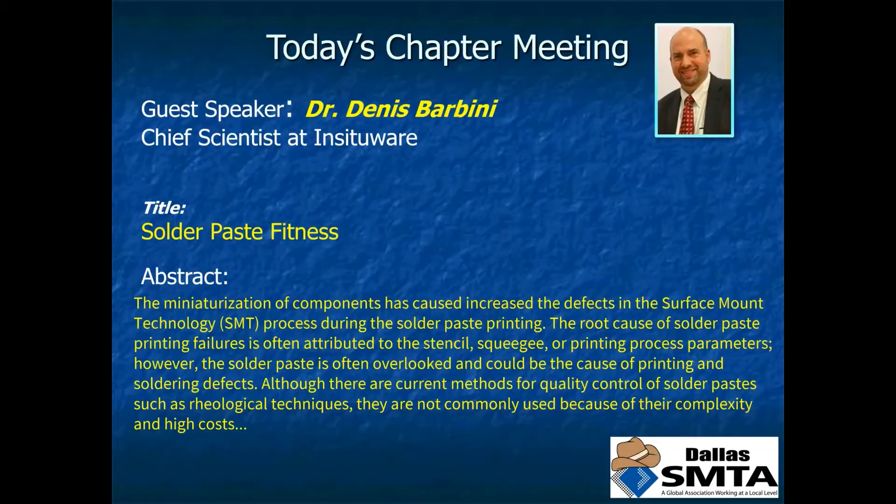What I wanted to start off by saying is, when I look at what's going on now, one of the things I've been participating in and reading about is how resilient we are as an industry. In my time, which dates back to the mid-90s, we've had many challenges: economic downturns, shifting manufacturing geographies, pandemics—not just COVID-19, but also SARS and MERS, though those were smaller. We've had to deal with material bans, CFCs, banning lead, and going to RoHS.

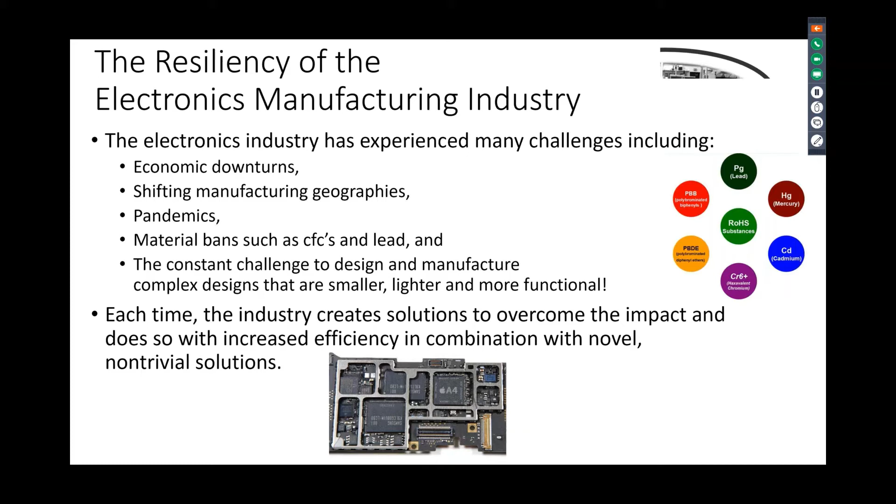All of these things were very challenging to the industry, and there's always a constant challenge to design and manufacture complex products that are smaller, lighter, and more functional. What I've observed over those couple of decades is that each time, the industry creates solutions to overcome the impact, and does so with increased efficiency and innovation that's novel and non-trivial. So we come back stronger and better, and we're able to deliver what our customers are asking for. So that's the good news.

We'll get through this. How are we dealing with COVID-19? When I look at this slide, the first response really focused on the safety and health of the workers, which continues today. This webinar today is the very reason we can't get together—we can't go in the room and sit down and have a beer like Gary was saying, but we can do it online.

Simultaneously, the demands of some companies were to keep going because they're essential and need to produce at certain rates for ventilators and products of that kind of impact, while other companies had to ramp down. Either way, this situation has created significant stress on our system.

So the next set of challenges is developing and implementing the new reality. For the individual, it's going to be based on safety training in this new reality, having new tools, having the flexibility to have different shifts or being able to stay safe. Those are the things that are really going to be focusing on the individual.

The workplace is going to change as well. There's all these different states saying this is how you can reintegrate, but it's going to limit person-to-person interaction, for safety for everybody. That's going to take a lot of training, looking at standards in manufacturing, such as smart factory being not just slowly integrated, but forced—in the next year to year and a half, we're going to have innovations that will change the way we manufacture.

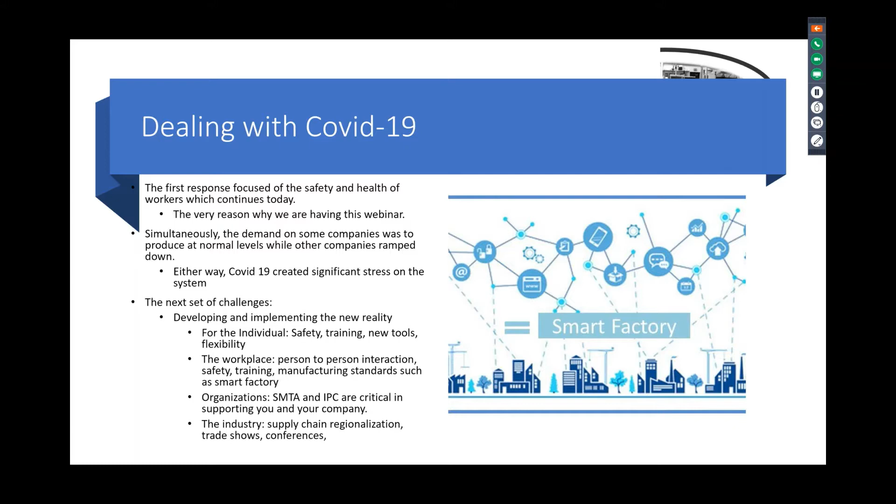This plays perfectly into the challenges that we have today, which have existed since electronics started: we want product miniaturization, we want to protect the environment, we have certain applications that demand power or demand the ability to take some resources. At the same time, we're concerned about the cost not being too much, but the quality being very high. Where does this blend into?

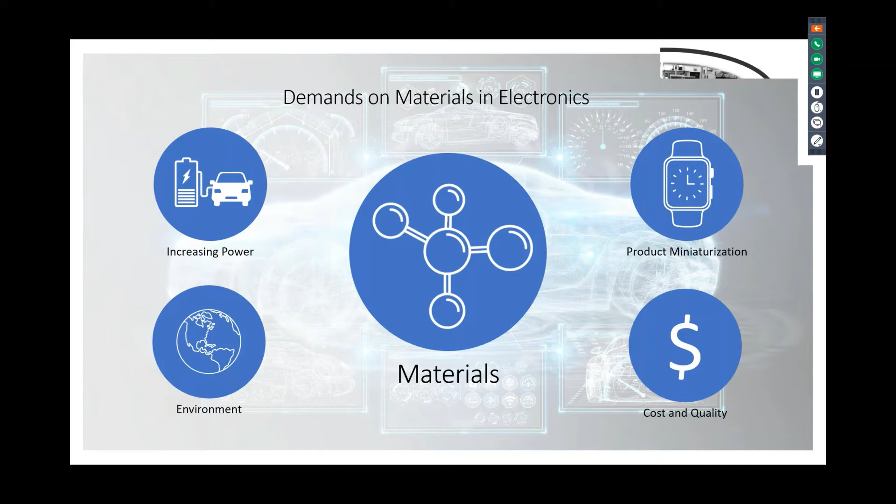The point of this slide is looking at, in the center, materials. If we can get the materials that are proper and use them in a proper way, then we have a good chance of making a good product that's successful at the cost that is appropriate. So that leads me into focusing on the rest of the presentation, which is why we control materials and how we do it.

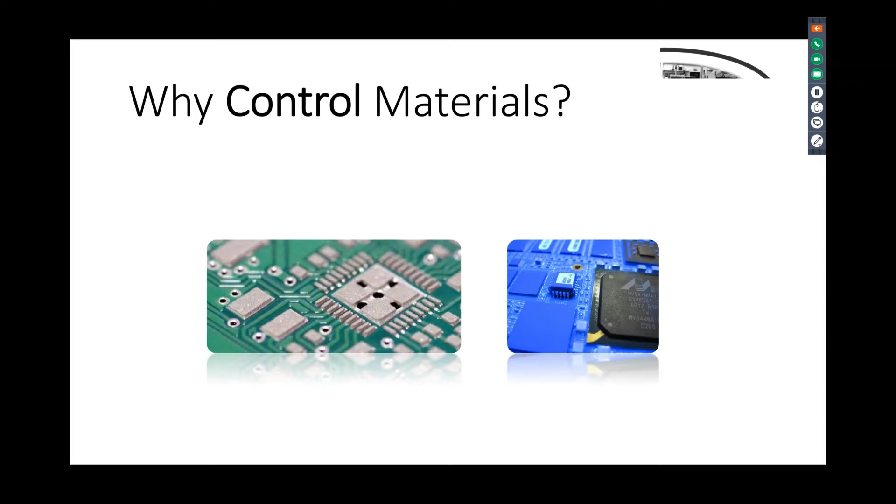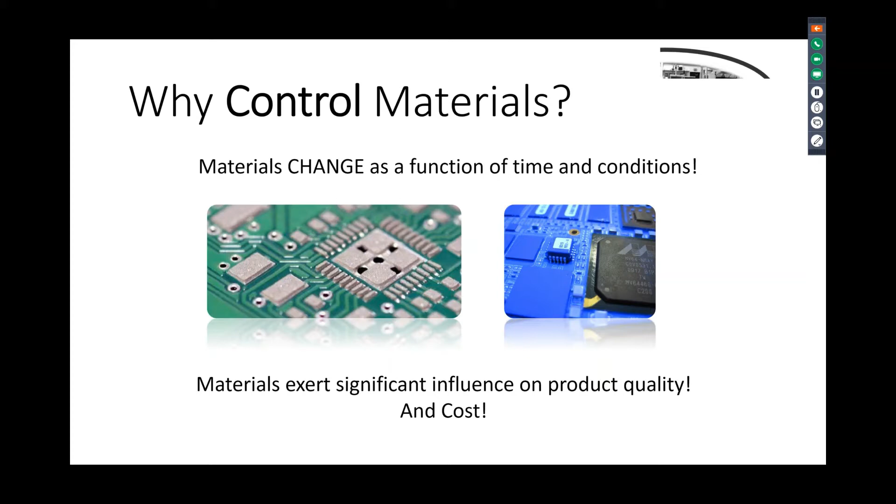So I'm going to be talking about this the rest of the time, saying we need to control materials, because materials change as a function of time and conditions. Materials are going to exert influence on product quality as well as the cost. So this is why we need to control materials.

It's very critical. On the process side, the manufacturing process, the industry has done a great job focusing on and understanding the assembly process - looking at how we do from printing to pick and place to reflow. We have all these different tools to fix the process as well as the design. Failure analysis is a science unto itself and requires a very in-depth understanding of how the PCB is fabricated, rework, surface mount assembly, and a number of different topics here. So in any given factory, or a company, you need to have these types of expertise to make sure you're developing a process that's in control, minimizing your DPMO and increasing your yield.

So being able to characterize defects is very critical, but this is already at the end. We need to control the materials up front.

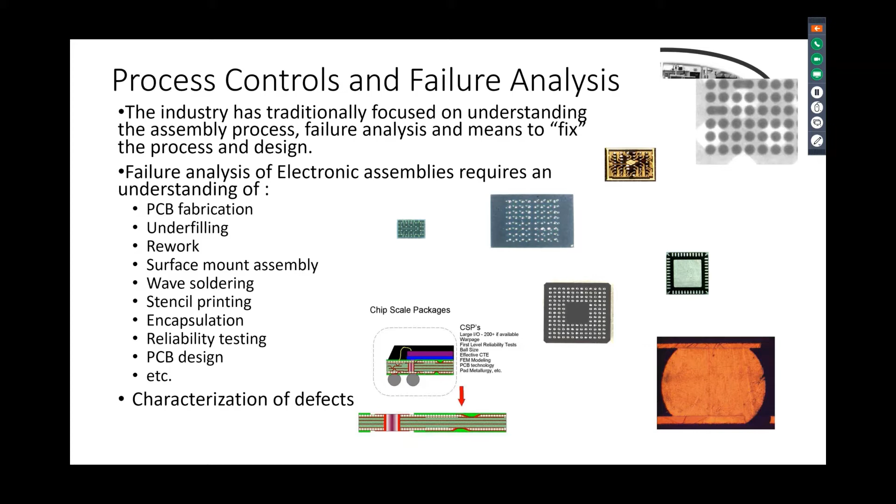So the current assembly process - we can say with confidence that there's been a lot of effort in controlling the manufacturing process, but we know that defects still occur. Solder paste inspection, SPI machines, exist because the printer, even though it has a lot of learning in it now, is still producing some defects. So the solder paste inspection goes back and can actually correct it now, can work with the printer to adjust the parameters. Reflow ovens and profiles are set up with golden boards, and they're able to do a very good job of keeping that process in check.

But once again, you have machines afterwards that are dealing with trying to inspect how many defects are on the board. So we're getting to the next level of a smart factory, where these machines have the capability to communicate to one another and dynamically, on the fly, change process parameters to improve yields. However, even after we have all this sophistication, the manufacturer still doesn't have control over the performance of its materials.

So as I mentioned, when the SPI communicates to the printer, you can make some changes here and there, but it's not responding to the material change. It's not responding to saying, okay, my material started at time zero, but now at time one hour, it's changed - maybe the temperature, the humidity has changed, or it's been absorbing something, and as a function of the properties, now we're creating defects. So really we need to understand the characterizing and monitoring of the paste itself in this case.

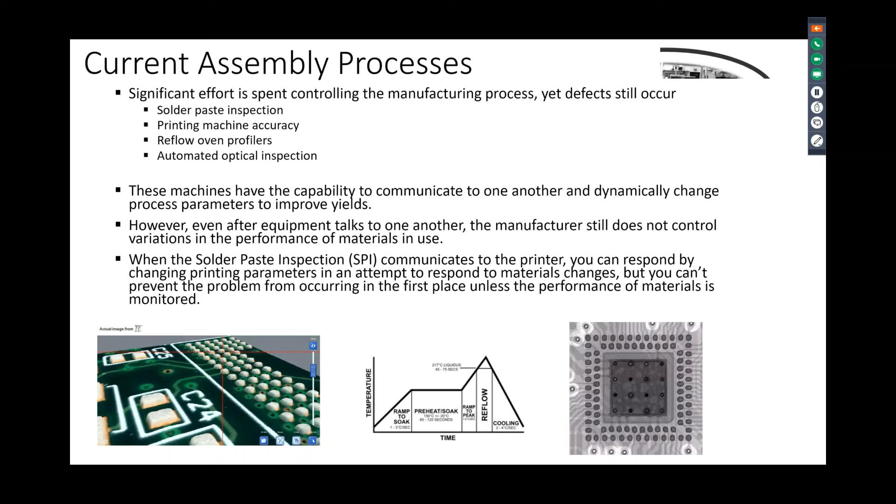So, material sensitivity. Process controls, as I mentioned, to summarize that part of it, exist to optimize the assembly process, but materials require proper handling and consequent characterization so that we can achieve the best quality. And these images right here are showing how materials can be sensitive - in this case, coalescence versus non-coalescence, on the left versus right. And it's a function of using nitrogen in a reflow process.

Well, why is that? Is there something with the paste? Is there something with the flux chemistry? It could be a number of different things. So we need to understand our materials.

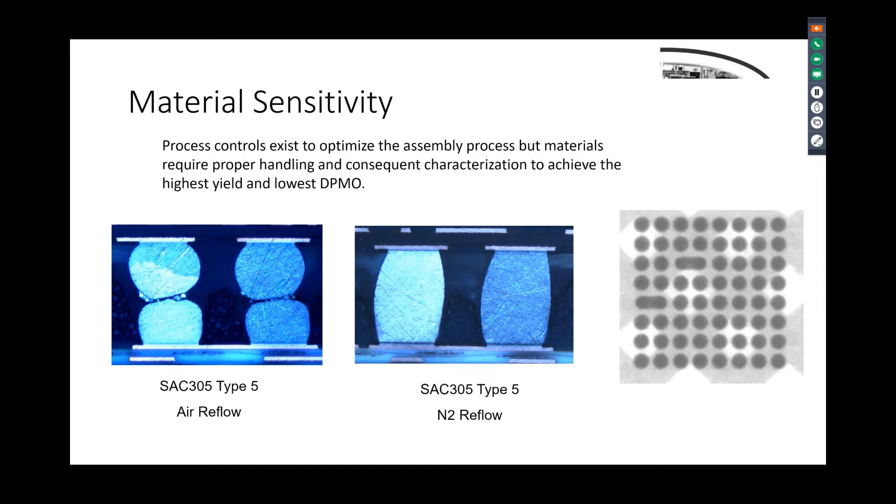So in this slide, we kind of assume that by taking care of our paste, our boards, and our components, everything is consistent and nothing's really changing on the manufacturing floor. But obviously this is not true. Unlike any other process input, you should expect materials to change as a function of usage and time in the factory environment.

So when it comes to manufacturing, we all look at what our process window is - how tight is it, so that we know where the sweet spot is, and we can control our parameters to try and maintain our assembly in the middle of that process window.

When it looks at shipping, if we have delays, or things are left out, or they're not packaged properly, materials are going to change. So how do we know that when we get the material, it's in the state that it was manufactured in? And then how long do you keep it on the shelf?

And this is a good example for these times, the times that we're in right now. As we move back to going to work, and things are opening up, and factories are opening up and ramping up volume production - have the materials changed since they were last used?

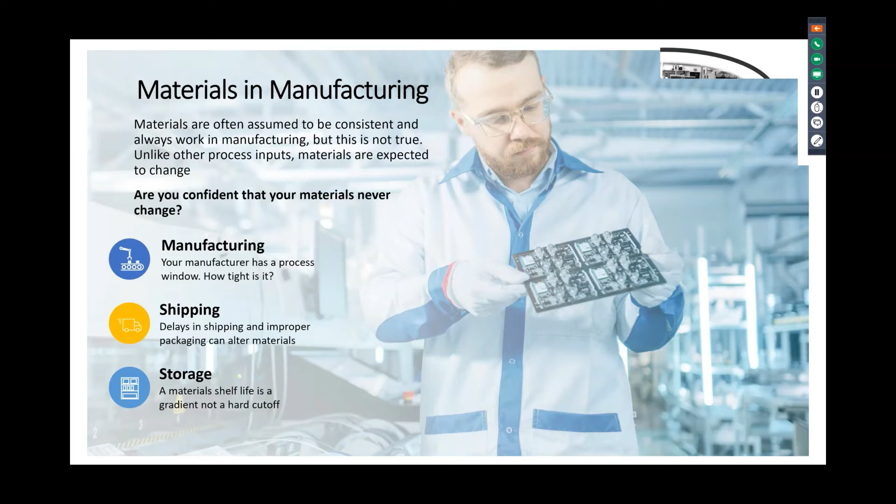How much inventory of PCBs, components and paste do you have on hand that may have been around for 2 months? Can you still use those, or has it gone beyond the expiration date? These are things that really are going to challenge us in the near future, if not already.

We need to understand how that will affect the ultimate reliability and quality of the process. Everyone's seen this type of slide where as you go from left to right, from 1 to 6, material problems become harder to diagnose and very costly. If we can measure material at block number 1, at incoming, and find out whether it's fit for use, versus waiting and looking after reflow, we can save a lot of time and money in test and rework. So we're going to talk about that quite a bit.

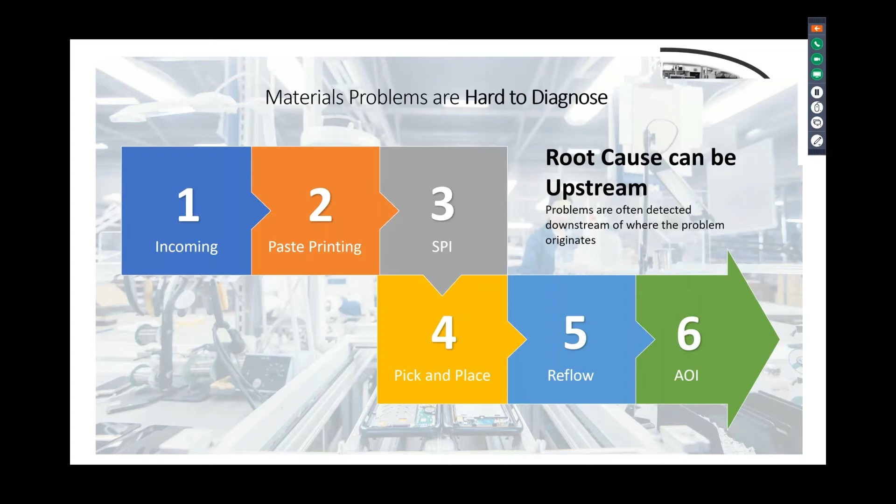So let's take a step back. I put a couple of slides in here to reach out to everybody listening, a question for all of us: as we return to normal manufacturing, do you know if your materials are going to be the same, or if they've changed? Are you going to be able to use these materials? Of course there are many different materials—I'm going to focus on paste, but there are many that could be of concern to you. Can you answer the question: how will material changes impact yield, DPMO, rework, you name it? It's going to affect your factory and its manufacturing process. So once again, I'm trying to communicate that we need to really control our materials and characterize them.

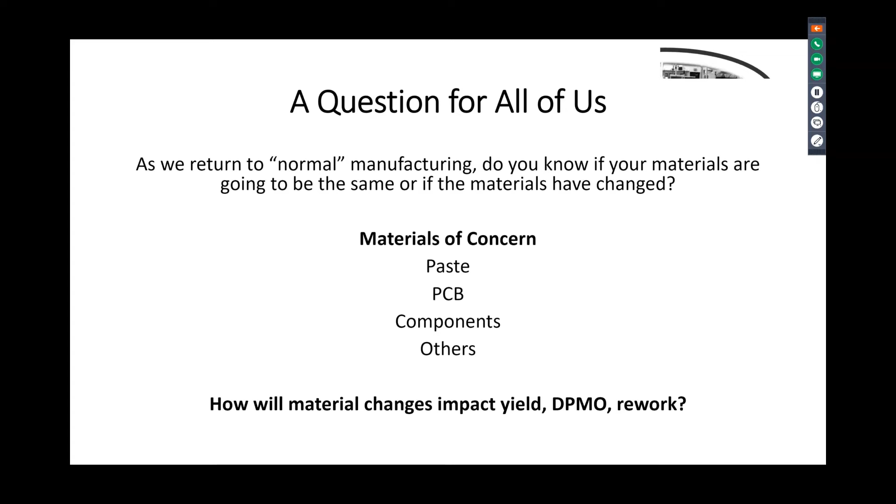In corroboration with that, as you go down the process, it becomes harder and more costly to fix problems. We know that 50 to 70%, depending on who you ask, of defects in surface mount are related to the printing process. And a subsequent 30 to 50%, almost half of the manufacturing cost, is due to test and rework.

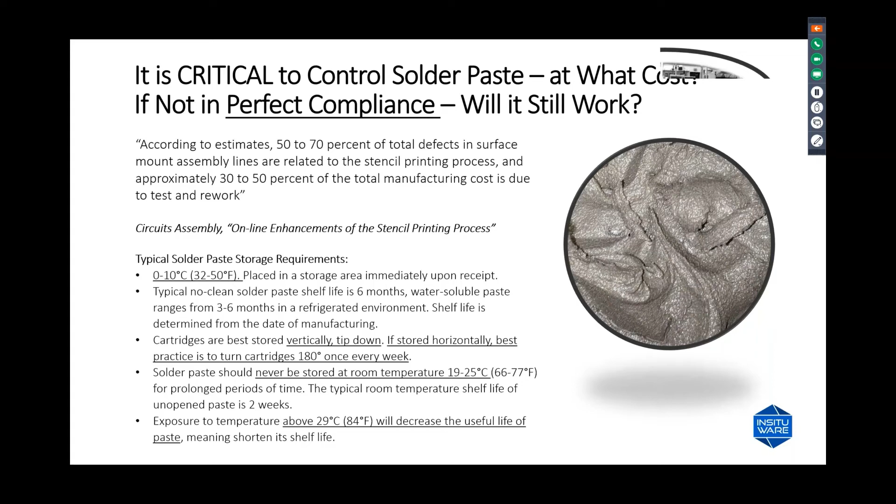We do a great job of understanding the printer and the parameters that are important. We have SPI, and now we have a method that tells you how to store your paste—it gives you the temperature and a number of different things you should do. Then on this page, you look at first in, first out. Paste should be brought to room temperature for 3 to 4 hours, and you should never use a mixer, things of that nature. These are just guidelines that say if you do this, your paste will be fit for use.

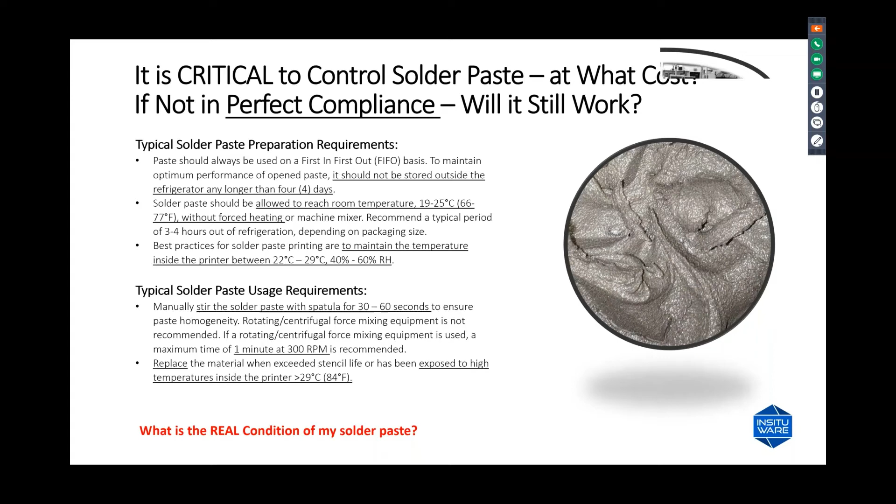But what is the real condition of your solder paste? When Insituware looks at how to track paste fitness for use—right now, as it currently exists, the paste supplier provides conditions for storage, preparation for use, and actual use. The factory has best practices and a manufacturing flow you have to use in order to get the best yield and the best DPMO.

This is based on experience, based on design and controls the company has put in place. There are systems that exist tailored to track all materials, not just paste, from receiving to use on the factory floor as it travels through the manufacturing process. This gives the manufacturer traceability of the paste container. Then you have the combination of printer, SPI, reflow, and AOI systems that provide feedback to improve process parameters and mitigate defects. That's what we do today in most factories.

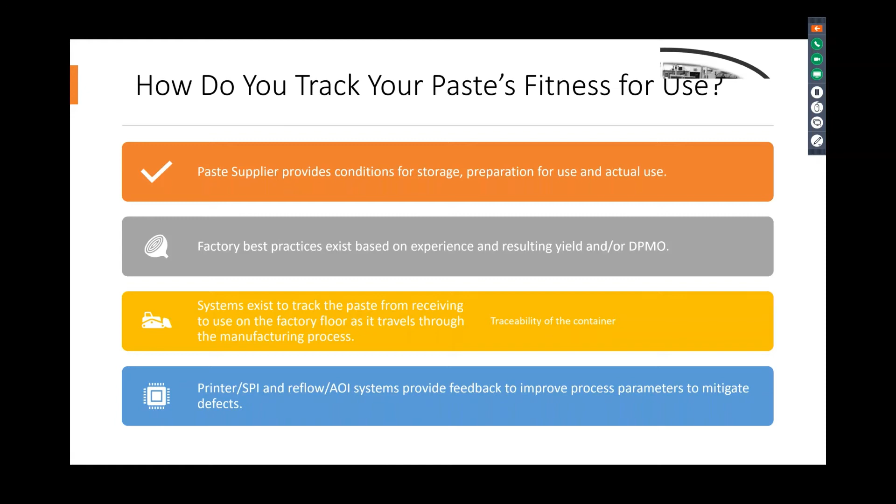But I just went through a whole bunch of things—are we really monitoring the paste itself? The answer is no. And that's why we're looking at the need to revolutionize the way we control materials in manufacturing. How are we going to do this? We're going to take material science and material characterization techniques that started in the laboratory and bring them to the manufacturing floor. Sounds pretty easy—it's very complex, but it's something we've pioneered in doing.

So to drive home the point that materials change over time, this is a simple rheology experiment where the x-axis looks at time zero. You put paste on the stencil at initial time zero, through 12 hours, and you're looking at how the paste is going to recover.

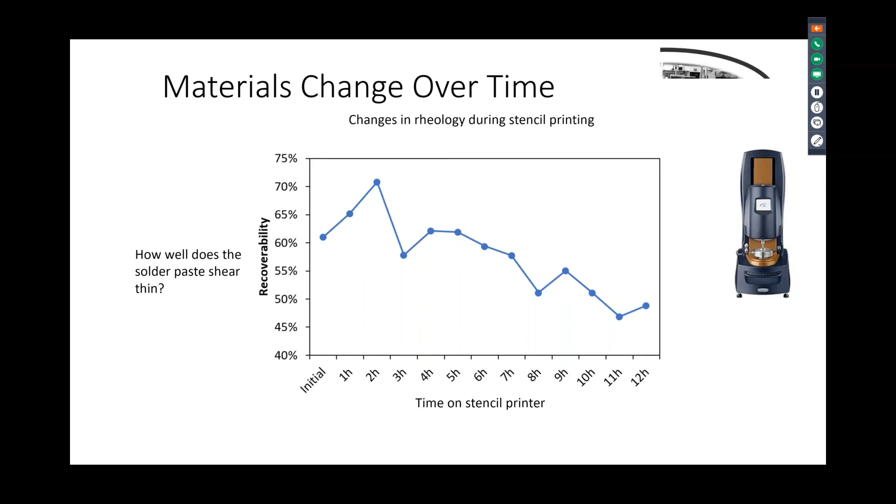We start about an average of 65%, and we go down to, let's say, 45%. So you have a 20% decrease in rheology. Now, how is that going to cause defects? Well, the material certainly changed, so that's going to impact the paste transfer through the stencil and ultimately cause a number of defects.

That's why Insituware did the research, figured out how we can help the industry in measuring solder paste at the manufacturing floor within 3.5 minutes. So it's our vision system.

I'm not going to talk too much about that. I just want to really focus on the technology. If this is your line, we see there's more than just 5. We've kind of done about 18 different ways of where controlling your solder paste or monitoring can be made, and we're learning from customers like yourself how this could be used to improve your process.

But if you look at number 1, so we take a measurement, and I'm going to talk about that in a moment. We're going to be looking at incoming materials. So you get a shipment from your paste supplier. You can do a test and say, okay, this is the baseline of the material, and it's representative of the lot. And then we can track it lot to lot over time to see if there's any variation in the viability. And if anything happens, then you can contact the paste supplier right at the start without even using it.

This is one of the things I'm talking about, if you manufacture the entire product but never measured it at incoming, that could be a major problem.

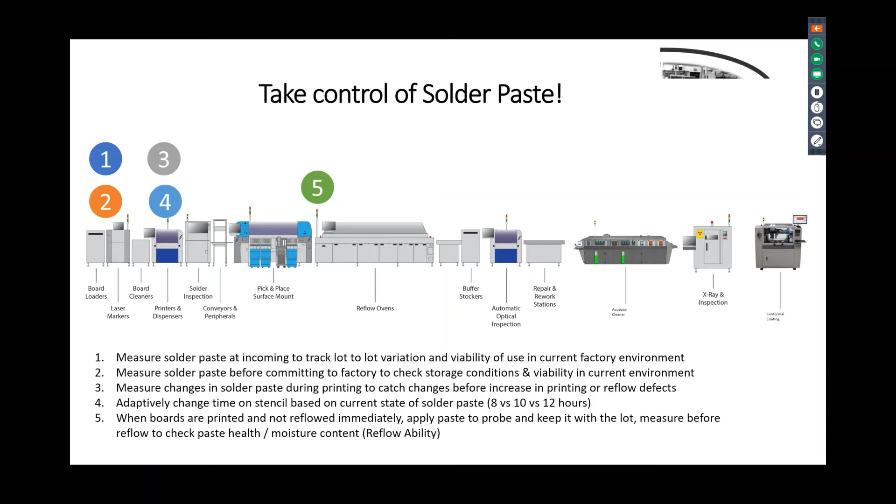So what are we measuring? It depends on if it's water soluble or a no clean. But for water soluble, number 1 here is the powder reactivity coefficient, the PRC. This is due to the aggressive nature of the flux-powder interaction. It's very aggressive, we're trying to remove the oxides from the metal surface. And in water soluble, that happens very quickly. So we're measuring the PRC in water soluble.

And in no clean, the activator package is much different, so it's not as aggressive. This way you don't have to wash it. And as a result, we're looking at the ion mobility within the bulk of the flux. So that is going to be at a slower rate, and it happens in the bulk flux media, which is different from the activator interacting with the metal. So how does this work?

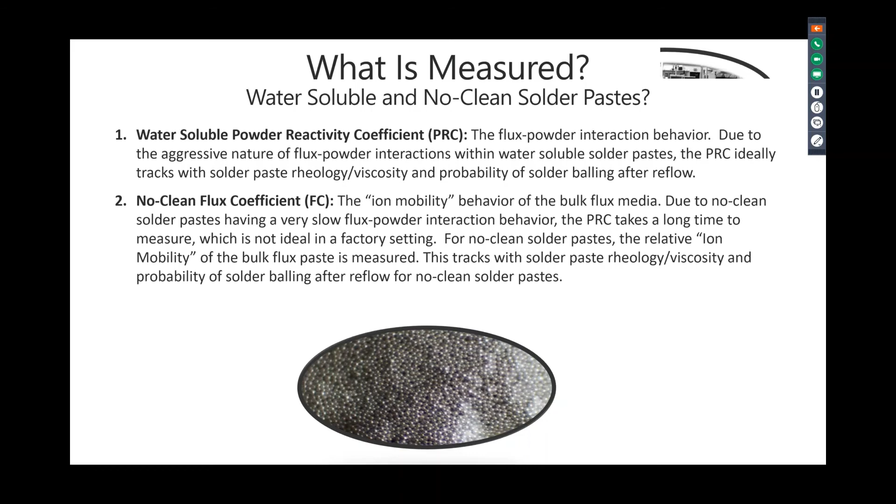It's electrochemical analysis. On the left-hand side, you see little deposits of solder spheres and paste. On the right, top right, you see the electrochemical scheme. You have a working electrode on the left, reference electrode on the right, and the metal acts as a resistor. The flux media itself has capacitance and resistance.

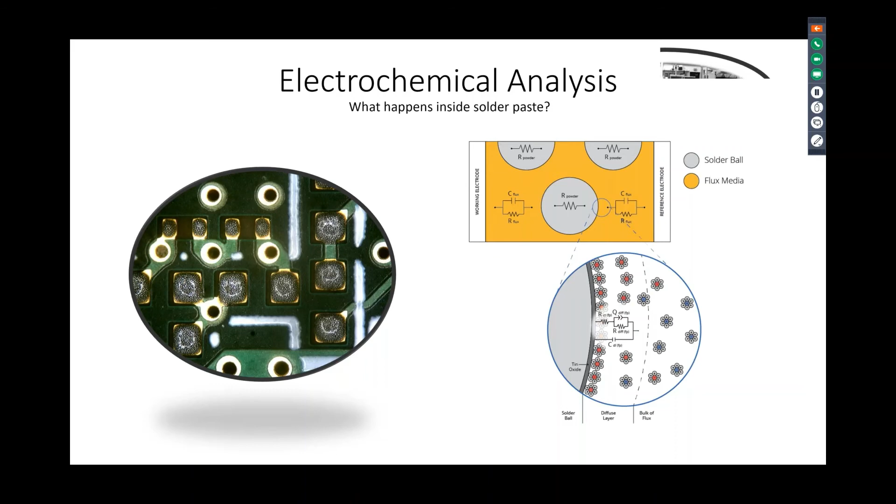We're looking at the reaction of the bulk media, the blue spheres on the right, and how fast those ions are moving. Versus, for water-soluble paste, we're looking at what's happening between the surface of the metal, removing the oxides with the activator. So depending on the paste type, that is what we're looking at.

This talks about homogeneous materials—these are the bulk properties, over to the right-hand side of that sphere with the blue molecules. The heterogeneous is basically the reaction rate between the oxides on the metal and how fast that interaction is taking place.

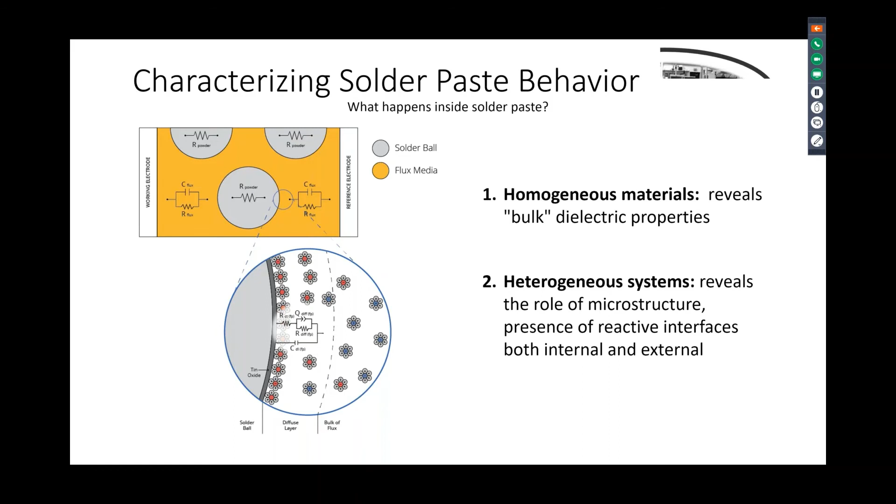So what we're trying to do here is apply electrochemical understanding to printing performance. A little bit of science there. But what does this mean in terms of manufacturing?

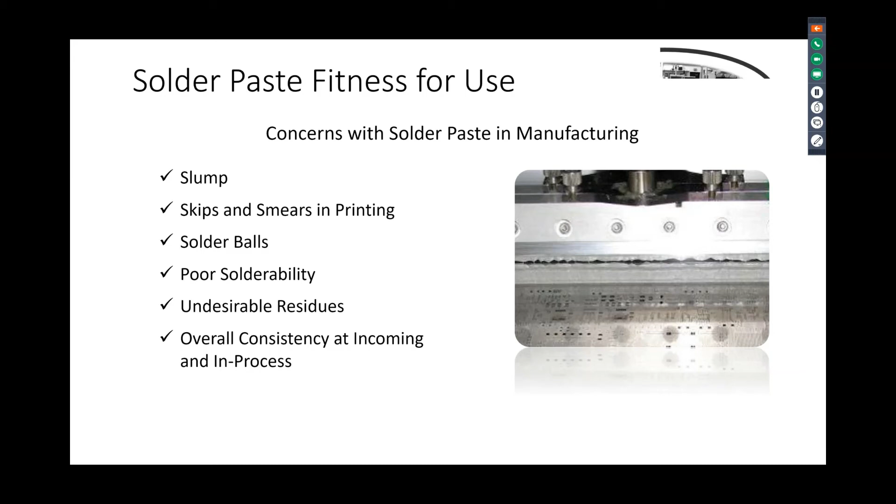Basically, we're looking to address concerns in the manufacturing process like slumping, skips, smears, solder balls, and in soldering, poor solderability, undesirable residues, and consistency issues at incoming and in-process. Once again, we're trying to determine if the solder paste is fit for use depending on its chemical formulation as a function of time and conditions.

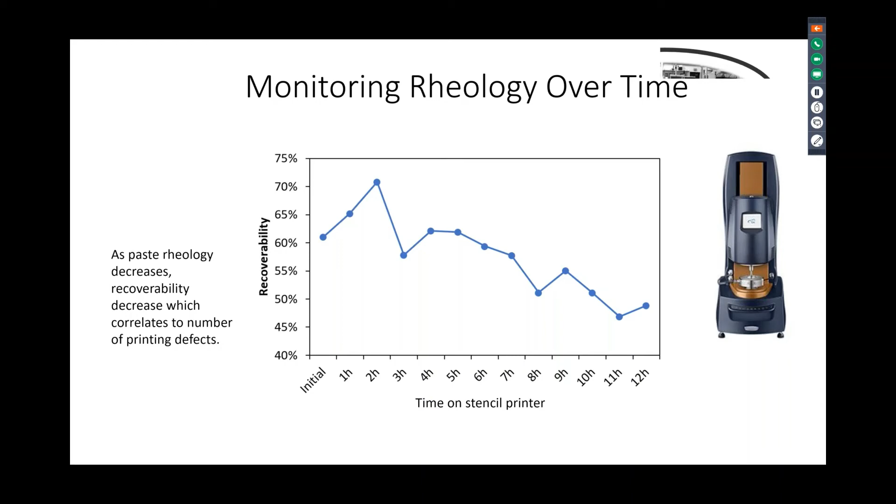I showed this slide before, but now you're seeing how this is an important property. As the paste rheology decreases, recoverability decreases, which correlates to the number of printing defects. So in this case study, we looked at defects as a function of paste fitness.

Using SPC type of analysis here, we're overlaying data—below the yellow line, you're in control. So you're measuring the PRC, the powder reactivity coefficient, and any number below that yellow line is in spec. If it goes beyond, you're in a place where you might get some defects.

But once you get above the red line, around 3 in this case, you start to see skips. So once again, this is like you'd do with any other machine—you have these control limits set up that tell you whether or not the process is in control.

Now we're taking our material measurement and doing the same thing, relating it to the defects. So this is the missing piece of the assembly process—we're combining the knowledge of the machines with the knowledge of what's going on with the paste.

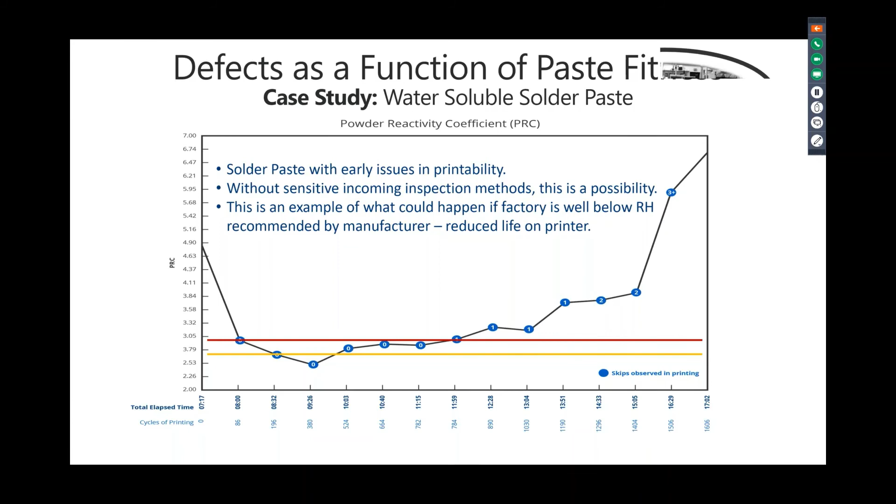We know there are many properties that affect the paste itself. These are things typically done at the paste supplier or in the lab, where you're measuring the rheologic properties, the bulk ionics, the solubility. You're not doing this on the manufacturing floor. So that's what we're changing.

We're taking these analytical tools and bringing them to the manufacturing floor, giving you very rapid results to let you know right away whether or not your paste is going to be fit for use.

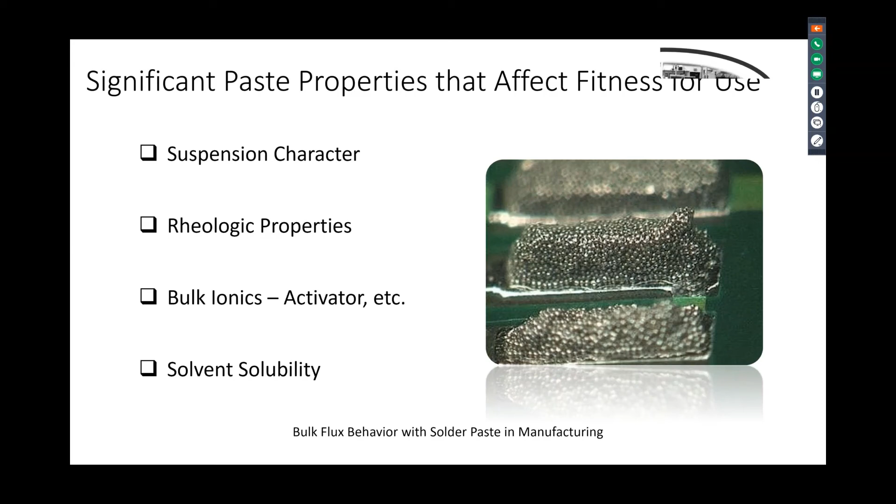How does that affect your reliability, or your performance, or paste transfer, and ultimately product performance and yield? So once again, by measuring the flux coefficient and making sure it correlates to the defects you're observing, you can put these control limits in place.

So that any operator can just make a measurement, plug it into the information system, and it will say whether this is out of control or in control. That will be on the device—the device will tell you that. So these are the important things.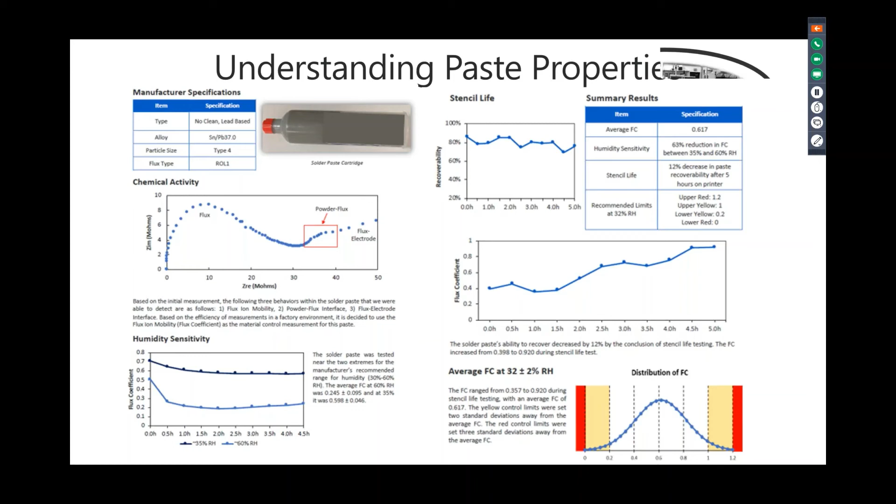If I look at the bottom right of this, I want to translate the paste properties to the fitness for use. Ultimately, the bottom right is this process control limits that we're trying to achieve. Being able to say, if your process window for a given paste at a given humidity and temperature, you can set it so that paste has a value that's somewhere between the limits, the yellow and the red. That's where you want to be.

Same thing you would do in a reflow oven, whether time above liquidus or overall time, how much heat a component can absorb. So these are things that really kind of put together all the attributes of a manufacturing process that gives you the power to optimize and get the best yield.

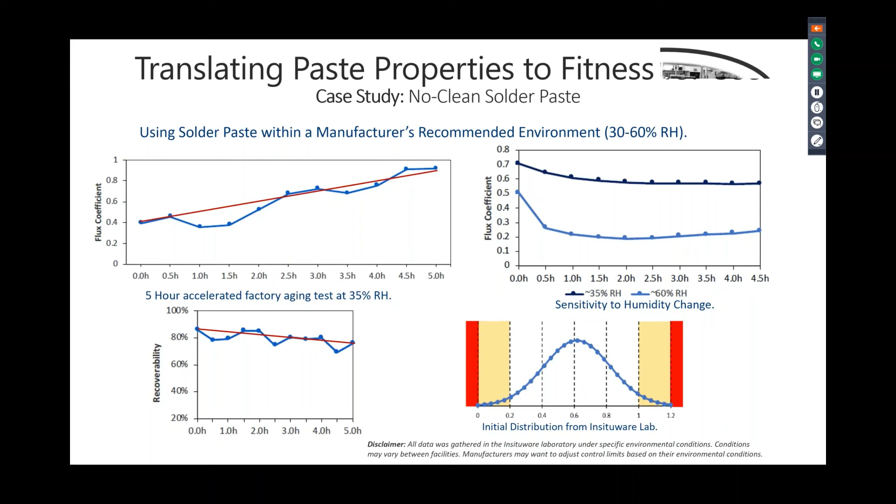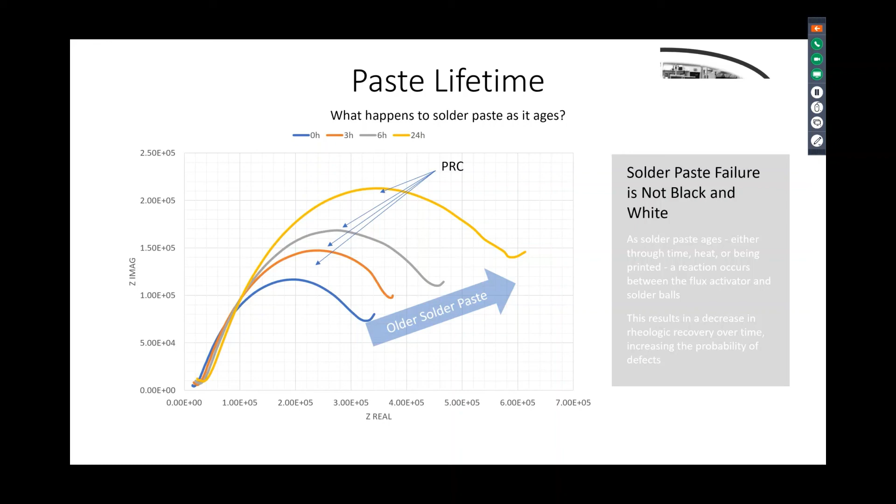So I just wanted to let you know that it's not black and white. Solder paste failure is not something that's easy to do. And what happens over its lifetime? This is PRC. It has 4 different curves you can see, and they're all based on different hours. 0 is the blue bottom, and 24 hours is the yellow all the way on top. What you're seeing is a much different behavior of the paste itself. This is why it's important to measure and characterize what's going on in your paste.

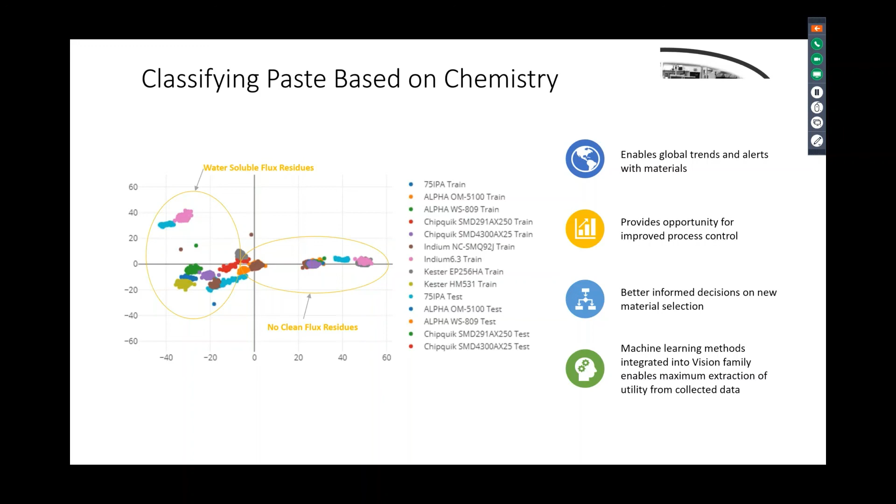We also, using this type of technology, are able to classify what a no-clean flux looks like, what water soluble looks like, based upon the chemistries being used in industry. So a lot of analytical tools available to say every paste is unique, but they fall into certain categories. And this is what it looks like.

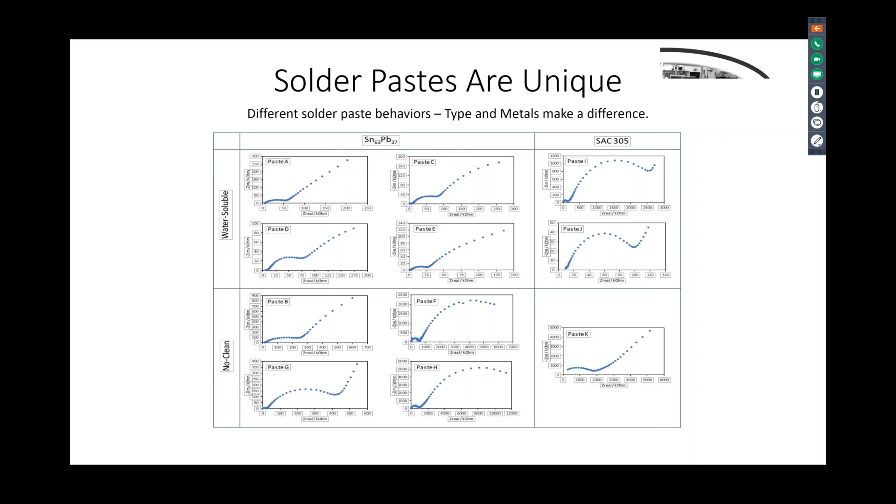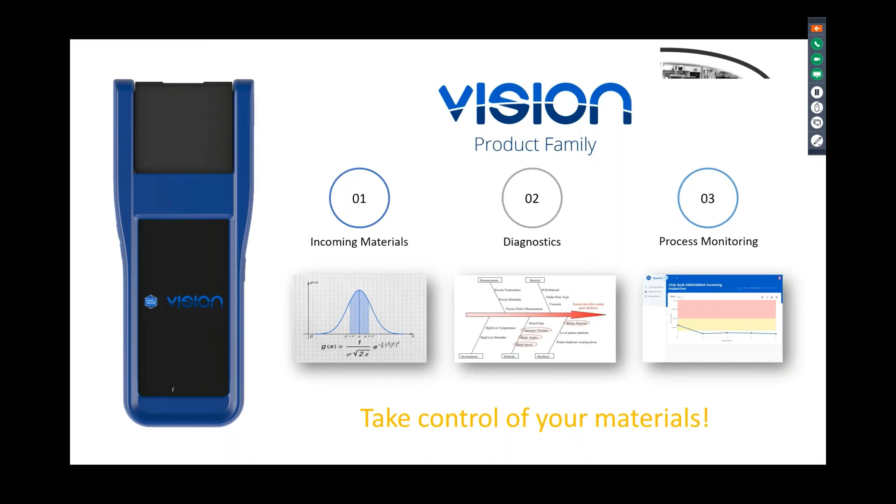And then ultimately, you want to be able to monitor the process, not just on day one, but throughout the day or over many days. This way, you have complete traceability of what's going on in your product development.

So a couple of things. Our family of insights, meaning what materials are we going to be measuring? Today I just spoke about solder paste. We're also looking at conformal coats. We're also looking at cleanliness, looking at residue characterization. So we have a roadmap using the same device to look at other materials that are of interest to you and to the industry. So one day when we have time to talk about other material characterization, we'll do so.

But this is right now our first product release, was released at Apex, and is being evaluated these days.

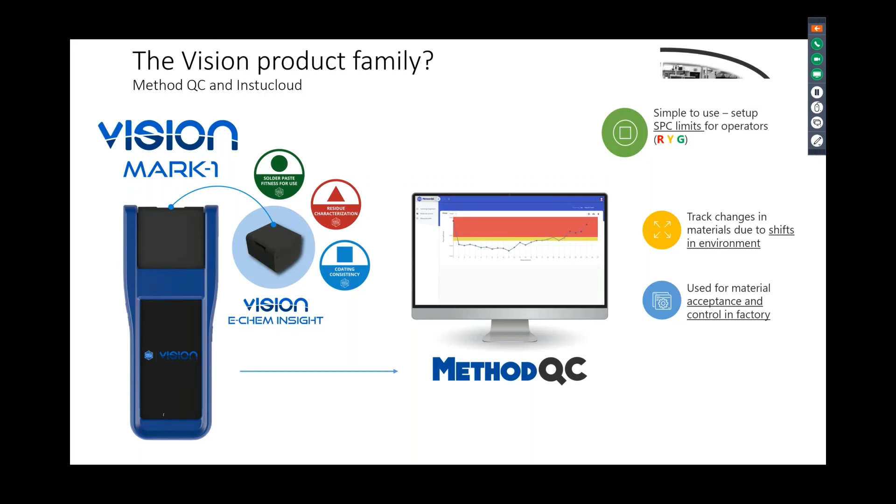So I'm going to finish. I'm going to wrap up here with a question once again for all of us. Material characterization and material control is critical to optimizing the process, and I hope I've driven that home and you understand it. I'd be happy to see your feedback and your thoughts on this. But we believe that real-time understanding of materials being used in the manufacturing process is the only way to provide objective evidence, complete traceability, so that you can achieve improved efficiencies and quality with minimal resources.

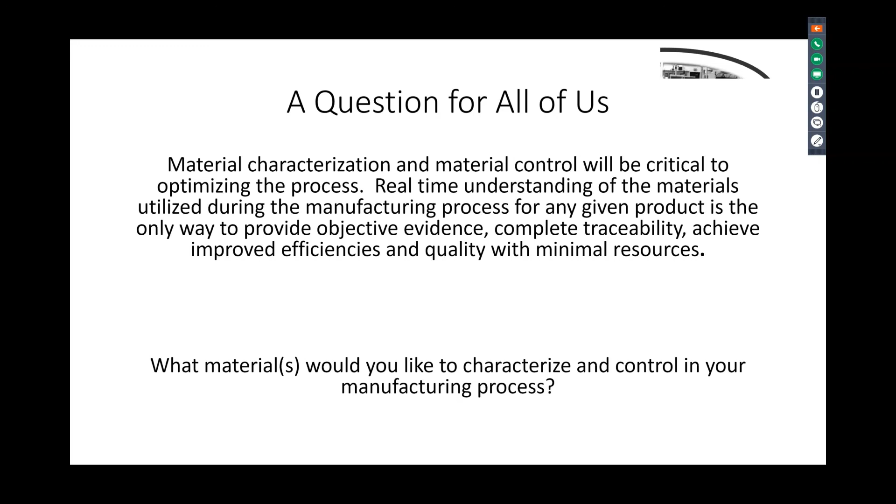And with that, I would like to know, and I know my colleagues would like to know as well, what materials would you like to characterize and control in your manufacturing process? What do you think you need to make your product more reliable, better yield, at lower cost?